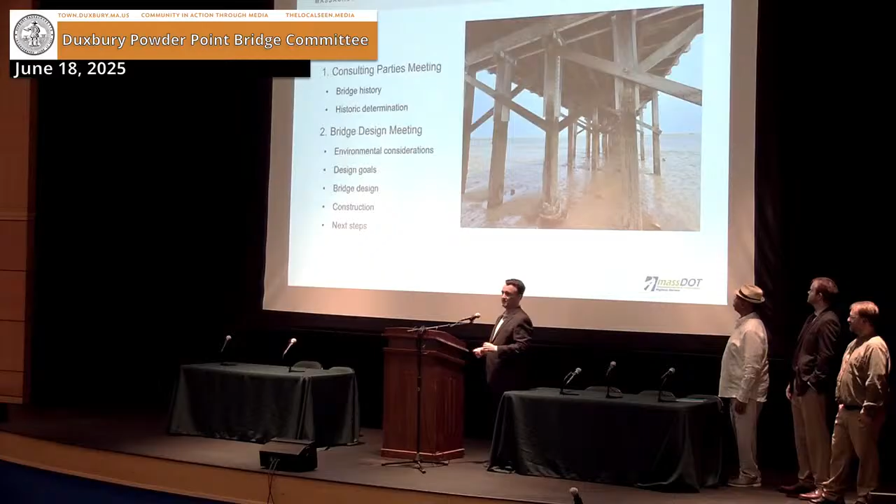One thing I want to remind you all is we are engaging in this public information process far earlier than normal, and that's good because you're involved. But I please ask you to be patient with us when we say we're not sure yet, we haven't gotten there yet. It's just important because you can't both come early and have all the answers. I know there might be a little frustration around that. It's an important thing to keep in mind.

Another thing, this isn't the only time we're coming here. We plan on coming several times because we know how important this bridge is to the community and we know how much back and forth there needs to be. So I just want to table set with that before I start plowing into this preordained presentation.

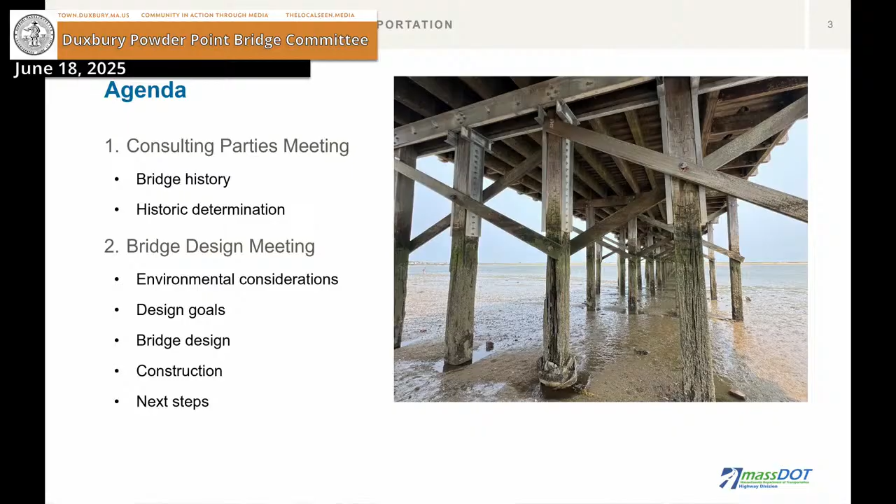Once we get to the bridge design meeting, we do environmental consideration, design goals, initial thoughts on bridge design, including some constraints due to federal requirements and state requirements, construction, and next steps.

Introductions. Myself, Marco Pereira, project manager with MassDOT Major Projects. We have Jeff Shrimpton, the program engineer for design in our environmental section. Kurt Jurgensen from Historic. George Batchelor to represent architecture, landscape architecture. And Shane Souza from our District 5 bridge section, who can speak on, should it come up, maintenance issues and the like. From the bridge design team, we have Peter Wu, who's the HDR, our consultant project manager, Tony Santoro, who's the deputy project manager, and Ben Holsapple, the HDR lead structural engineer.

With that, Jeff? Or sorry, Kurt, I apologize. Are these on? I mean, I can stand at the mic. I should introduce myself. I should, yeah. Good evening. Oh, this is not on. Oh, please. Good evening, everyone.

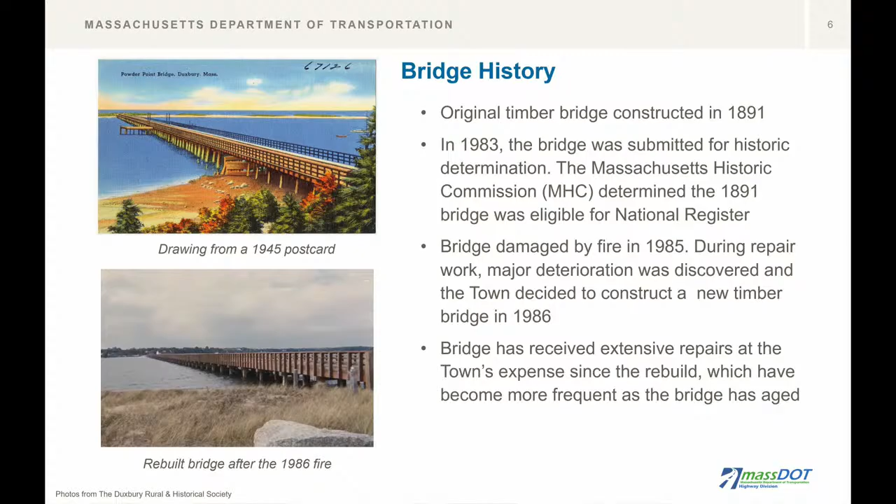So a little history on the bridge. The bridge at this site was first built in 1891. That was also a timber pile trestle structure.

In 1983-1984, the bridge was submitted to the Massachusetts Historical Commission, which is the state historic preservation office, for consideration of its historical status. At that time, the SHPO determined that the bridge was National Register eligible, despite having undergone successive rounds of repairs and replacement of original material.

A few years later, in 1985, the bridge was damaged by fire, and as repairs were being undertaken to address the damage done by the fire, it was discovered that there was significant deterioration present, and the town decided it was prudent to replace the bridge entirely at that time, and a new structure was built and opened in 1986.

Since that time, the existing 1986 bridge has also undergone extensive repairs, and those repairs have gotten more costly and come more frequently as time has gone on and the bridge has aged.

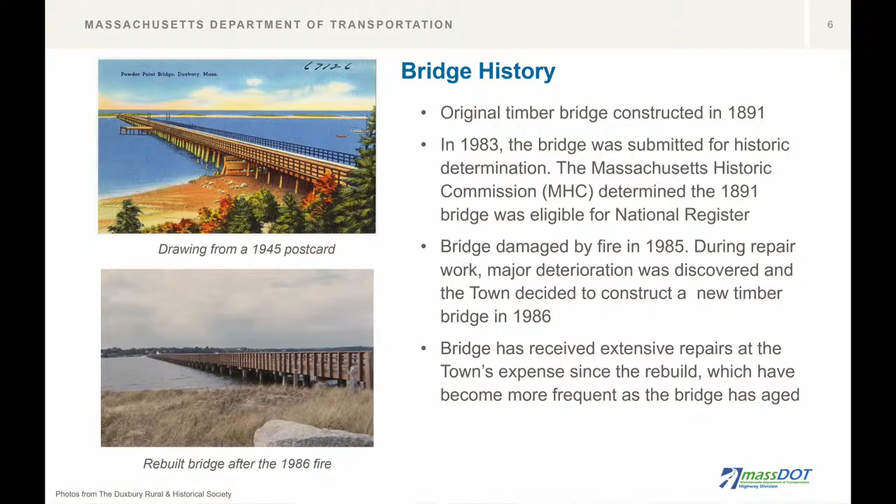Okay, the historic determination of the current bridge. MassDOT Cultural Resources, including myself, took a look at the 1986 bridge and the existing National Register eligibility determination from 1984, and we felt that it was warranted that we submit additional information for consideration to the Massachusetts Historical Commission, which we did in November of 2024.

Due to the existing bridge having been built in 1986, fully replacing the 1891 structure, the State Historic Preservation Officer determined that it was no longer National Register eligible, concurring with MassDOT's eligibility opinion.

There's a benchmark for buildings, structures, and sites to be considered eligible for listing in the National Register. Typically, 50 years is the benchmark, and anything younger, unless there are extraordinary and exceptional merits to be considered, will be considered ineligible.

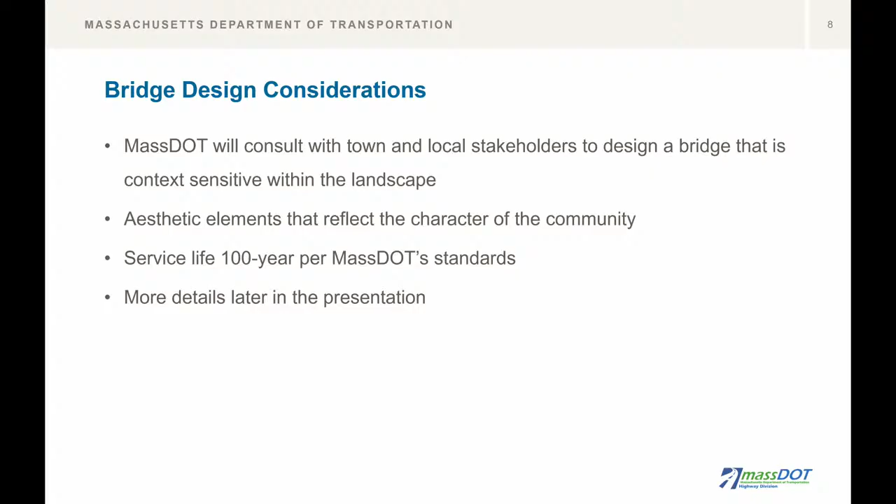More details will be discussed later in the presentation on aesthetic considerations we're thinking about and could potentially include. But as I said, we're fully open to new ideas and options that anybody may have to present.

At this point, I'll open it up briefly for questions specifically about Section 106, that process, the National Register eligibility status of the bridge, and everything I've been discussing right now.

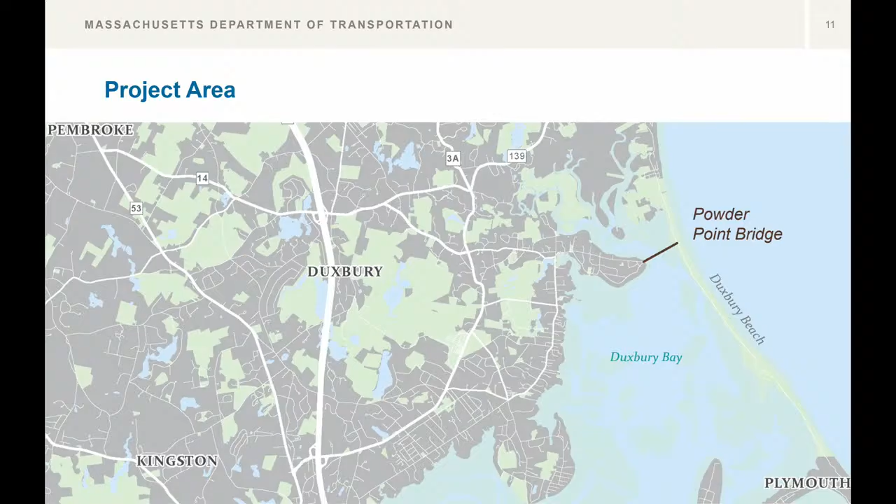Next slide, please. So I don't need to tell you where this bridge is - you all know, but for maybe hard of hearing, I'll say it's on the east side of Duxbury, and it's the only access directly from Duxbury to the beach. You can see it there in brown. Next slide.

Bridge condition, it's not great, you know this. Entirely timber structure with metal fasteners, in serious condition due to the marine environment, with some steel and fiber reinforced polymer repairs. In 2013, 40% of the piles were repaired with fiberglass jackets. By 2024, only 14% of the fiberglass jackets remained, and vehicles traveling over the bridge are limited to no more than 4 tons in weight.

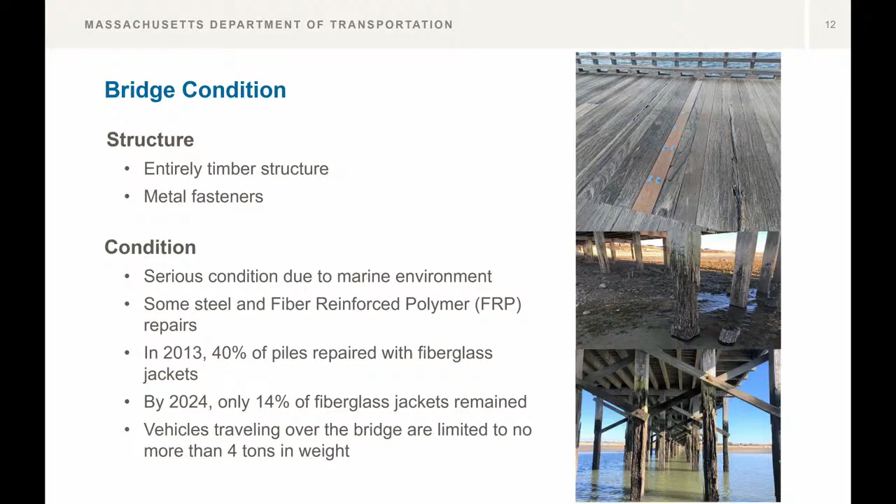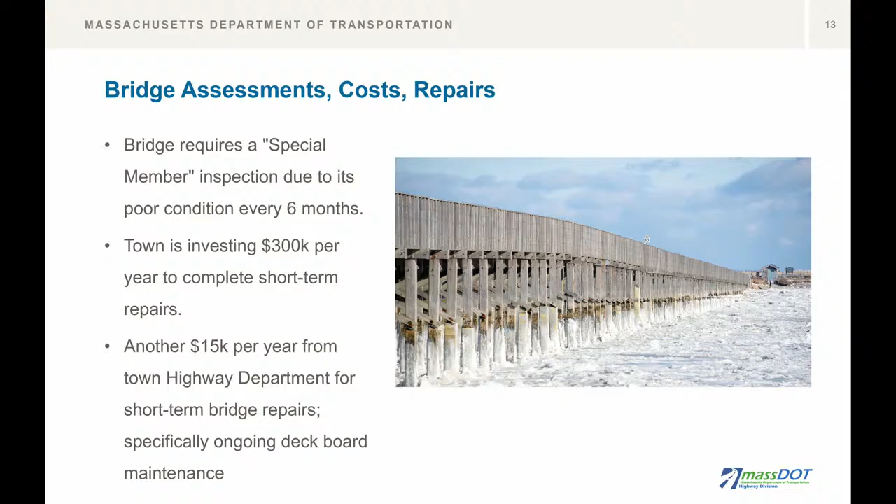The bridge requires a special member inspection due to its poor condition every 6 months. The town is investing $300K per year to complete short-term repairs, and another $15K per year from the Town Highway Department for short-term bridge repairs, specifically ongoing deckboard maintenance.

Again, we're just reiterating the same points. To construct a context-sensitive bridge, the key for us, looking through the lens of non-historic eligibility, pending challenges notwithstanding, we are obliged to build a bridge with a 100-year service life, that's MassDOT standards, just so we're not the only bad guys. The Federal Highway Administration, the funding authority, has a 100-year service life requirement, and that's important to keep in mind. Historic designation notwithstanding, we'll keep that in the back of our mind, understanding that if it goes in that direction, some of these things are moot.

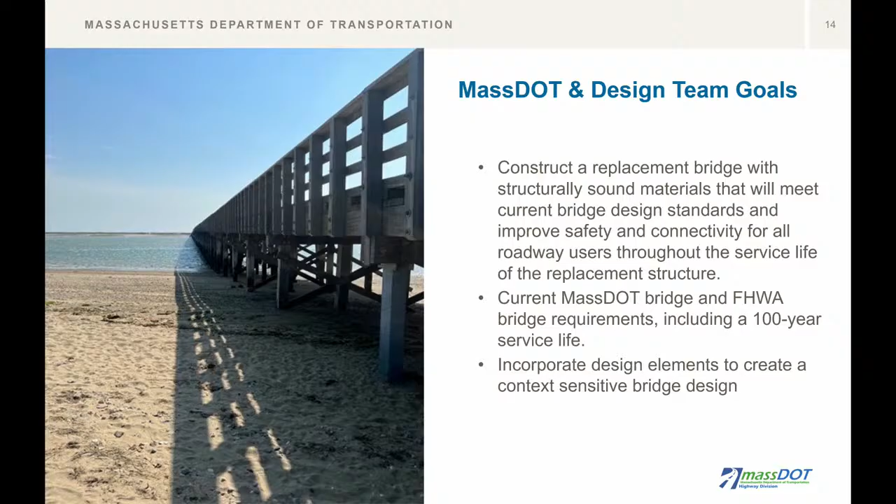So, what are we thinking? We know that the Mitchell River Bridge is the closest example. It's not the same bridge, let's start there. It doesn't have all the same elements, but it's a good example to start with.

We've heard from members of the community that there's a lot of corollary context. So again, through the lens of not historic, we asked ourselves, well, all that aside, what should we do for the community? What kind of bridge should we attempt to start the conversation on? I want to reemphasize, we are just starting the conversation. We are very early in the process.

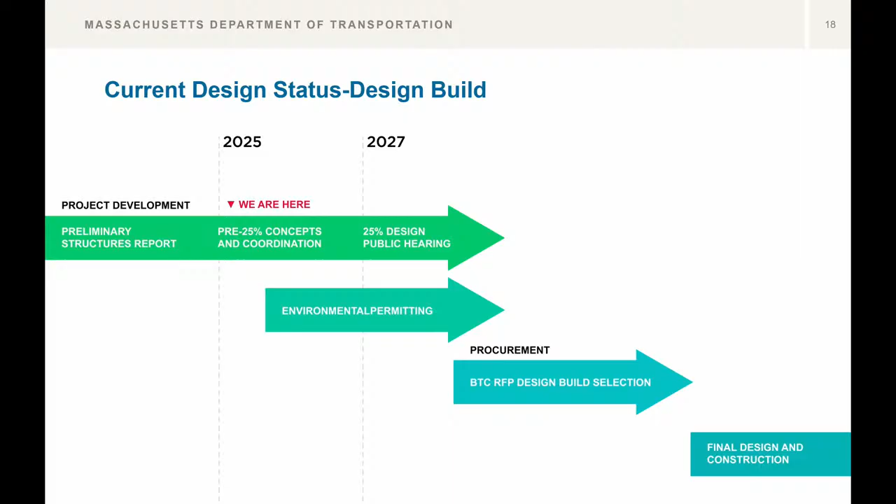With that, I'll turn it over to HDR to go over some of the environmental considerations, some of the design constraints, and then we'll circle back and we'll enter Q&A.

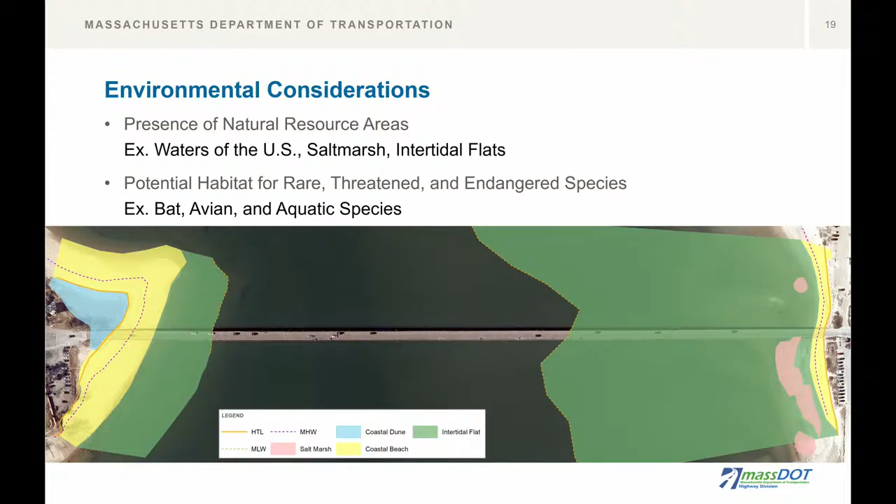Thank you, Marco. I'm Ben Holzak with HDR, lead bridge engineer. What you're looking at here is some of the initial environmental mapping that we've done. We've already gone out to the site, done some environmental surveys. So there are some protected areas around the bridge site. Notably on the east side there's some salt marsh. And the area is also within the potential habitat range of several protected animal species.

This is a screen grab from our hydraulic model. So this bridge is subject to both riverine and coastal behavior. That means tides and storm surges in particular. There is significant sea level rise that's projected in the area, so we're taking all that into account in our modeling. We're also doing some data collection to actually physically measure what the tide is and what the sediments are out there to help us calibrate our models to what's actually going on in the real world.

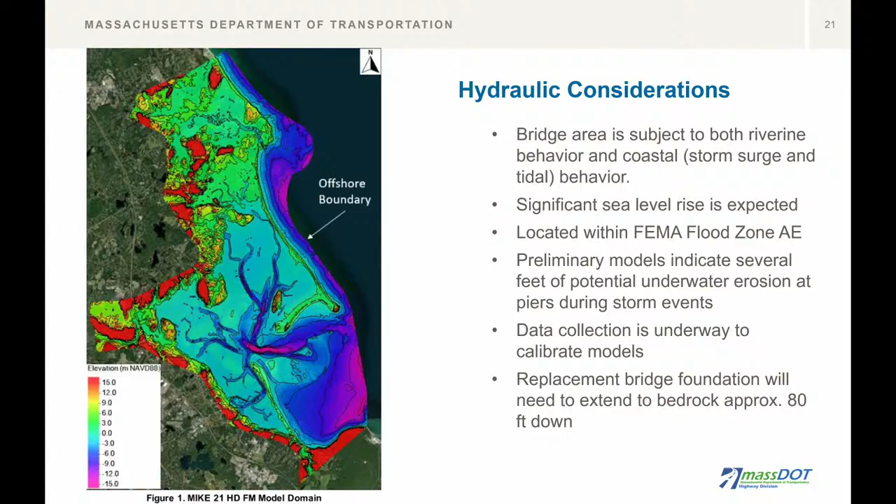So the preliminary, again very preliminary, models are indicating several feet of potential underwater erosion, what we call scour, at the bridge piers as you go across. That combined with the geotechnical information that we have is pushing us towards deep piles. They're going to have to go down to the bedrock, which is about 80 feet down, so they're going to be quite long piles that we're talking about here.

So we've alluded to this a couple times. Service life: MassDOT's requirement is the 100-year service life. Federal Highway has similar requirements. Service life does not mean that it lasts for 100 years and you never have to do any maintenance on it, that's not what that means. It means you have to do regular maintenance, but the primary structural components are expected to last 75, 100 or more years on new and replacement bridge structures.

So the existing structure, as you can tell, we're here today. We've been talking about 1986, that's not 100 years ago. The existing timber structure has not even close to met that criteria. And not only are we here today talking about it, but those substructures, the piles that are out there today, those have actually been rated in poor condition since 2012. So the bridge degraded quite quickly from when it was originally built.

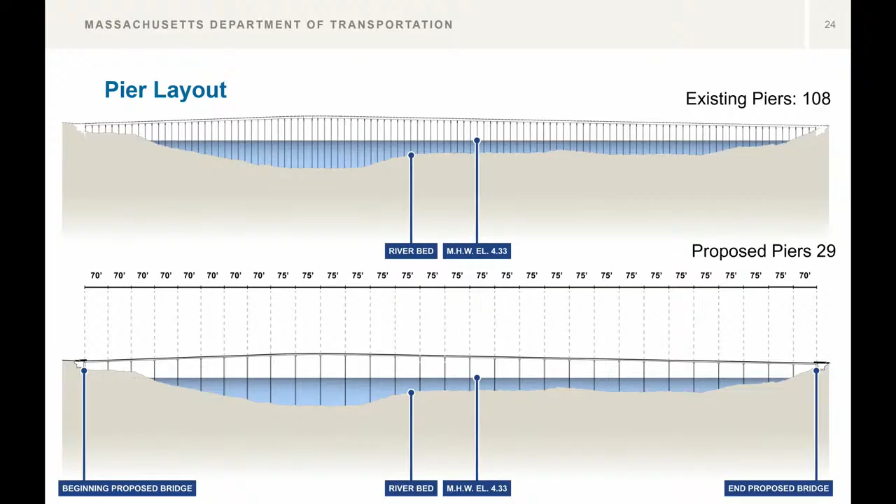With modern materials, we can have much longer spans. We're looking at 70, 75 feet versus 20 or 25 that's out there now. There's a lot of reasons to go with fewer spans and fewer piers in the water. The next slide has a few of them.

The pile installation is work that has to occur in the water. Typically, it's one of the most expensive and difficult to schedule parts of constructing a bridge. Going back to all the environmental considerations we have, when you're driving piles, you tend to generate a lot of turbidity, or silts and stuff in the water column. So there are very often significant time of year restrictions, meaning you're not allowed to do that during certain times of year when fish are breeding or things like that.

So the fewer piers you have in the water, the faster you can get it done, the cheaper you can get it done, and the less environmental impact you have. And not only the time of year, but each individual physical footprint that you put into the water is also considered an environmental impact. So there's a variety of reasons that push us towards fewer piers in the water.

We did do a study as well, just to look at what it would take to match the existing number of piles, all those restrictions notwithstanding. The preliminary analysis is that, because these piles have to go down 80 feet, and because it's difficult work in the water, that would add up to about $50 million to the project cost. So that's it. Next one.

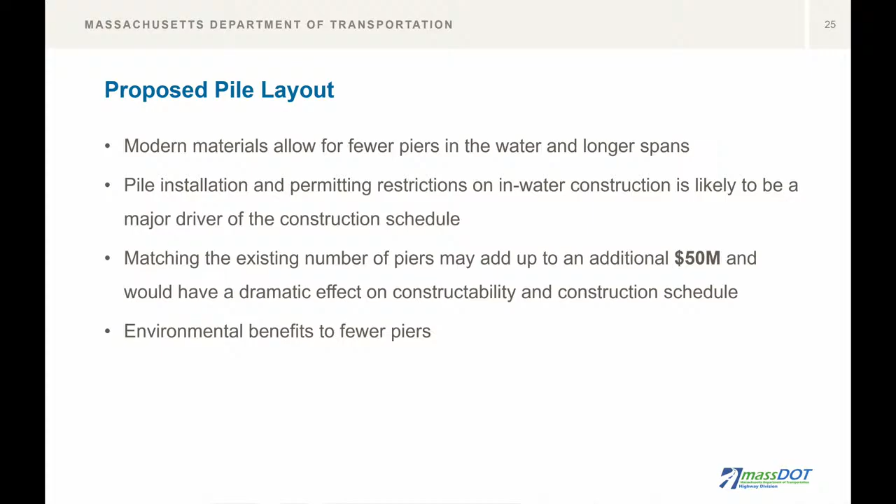Design elements and aesthetics, go ahead. We'll talk a little bit about cross-section. What's up there now is the existing bridge cross-section, timber bridge, 10-foot lanes, 5-foot-5 sidewalk. Go right to the next one.

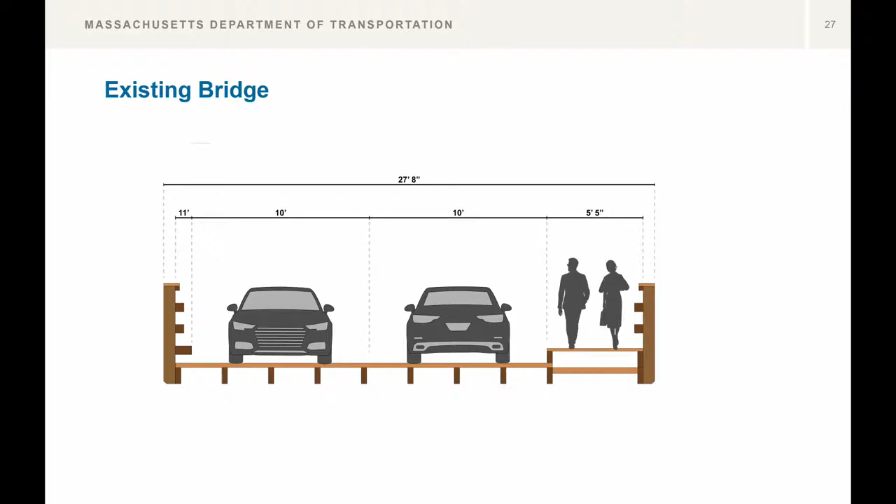This is kind of your baseline, one potential option for the bridge. There's a couple things I want to talk about and then move to what we can do. So we want to keep the relatively narrow lanes. 10-foot lanes is not what you're going to find on a highway or anything like that. You keep them relatively narrow to help encourage people to drive slow across the bridge. You don't want to widen it up too much so people feel like they can go quickly.

A slightly wider shared use path so that folks who are walking over the bridge or biking over the bridge have the room to do so. And then to bring your attention to the railings, we've alluded a few times to federal requirements. There is a federal requirement for bridge railings and traffic barriers.

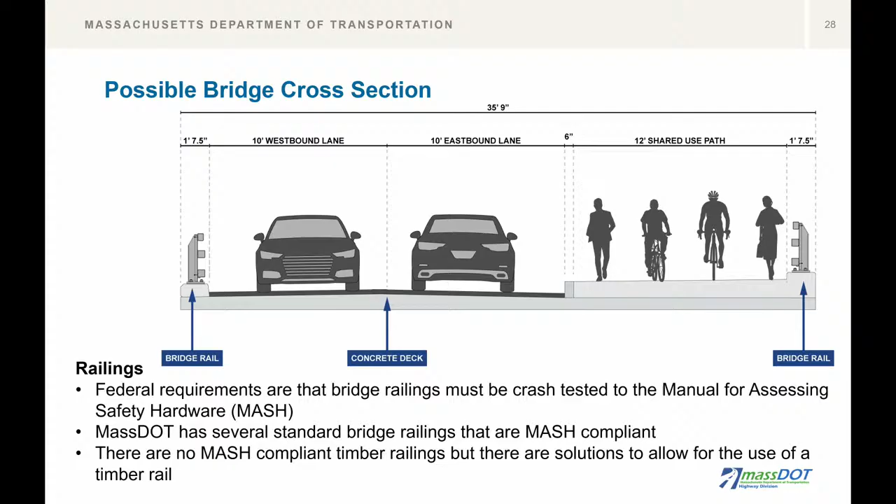It's called MASH, the Manual for Assessing Safety Hardware. And all projects that get federal funds have to meet MASH. So that's a specific criteria for the design, and more specifically, the crash testing of traffic barriers. MassDOT has a number of standard bridge railings that are MASH compliant, or crash-worthy as you'll sometimes hear. None of them are timber. However, we do have some strategies that we can use to get a timber railing on this bridge.

Bring it back around to some of what Marco was alluding to earlier. We've heard, even before tonight, Chatham as a good example for what the community might be interested in. So the timber rail I was just talking about, the photo on the left shows what that rail looks like from the outside. That's the Mitchell River Bridge in the photograph.

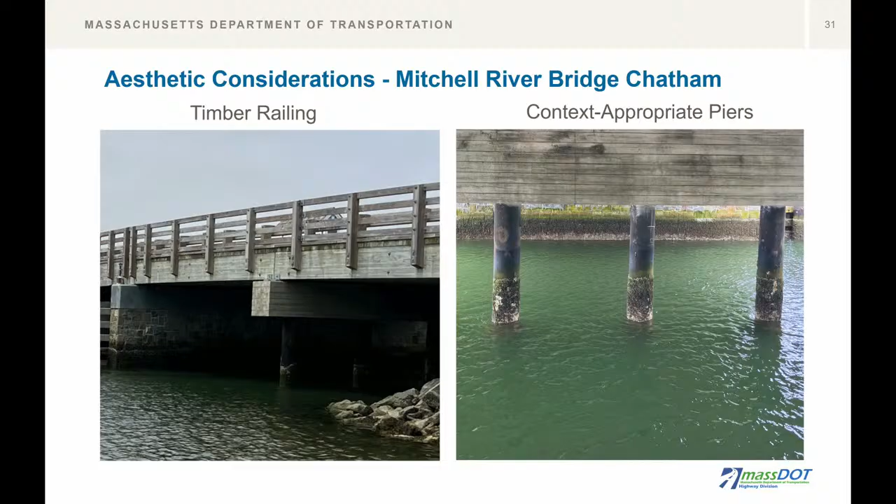That type of rail, protected from crash impact by that curb-mounted standard rail, is what we're looking at for the railing. Below, you can see an elevation, and in section on the right is the type of piers we spoke about. The vertical elements are the piles - that's what's going to go down 80 feet to bedrock. Then what we call the pile cap or pier cap would be concrete, but form-lined so it has a bit of the aesthetic appearance of timber.

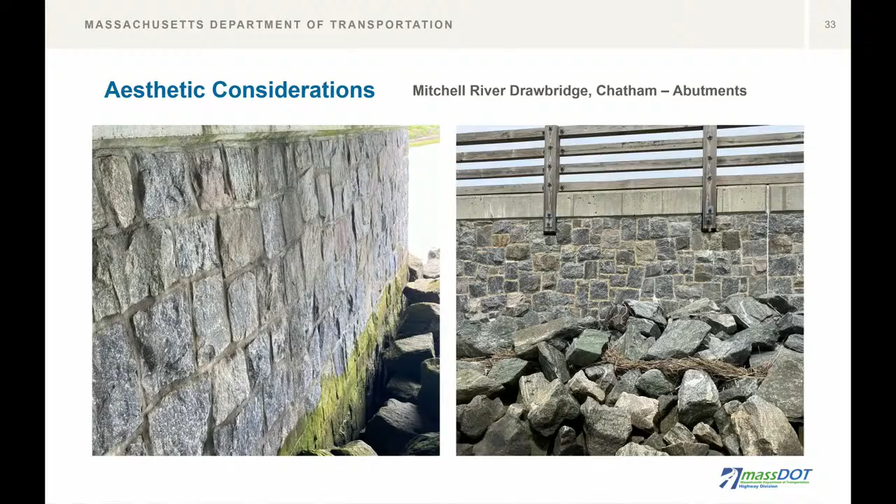A closer up view of the piers, again this is Chatham. The abutments - going back to meeting both context sensitivity and the actual design requirements of the structure. What's behind here isn't a stone masonry abutment, it's actually a concrete abutment, but in front they've faced it with actual stone. It's not a form liner, they're actual stones anchored back into the structural concrete abutment. So the concrete abutment gives us the strength we need, and the stone facing gives more of the aesthetics and context sensitivity.

Driving surface - Marco alluded to this a little bit, there was some discussion on it. The typical or standard or baseline would be black asphalt. We've already heard some feedback, so we're looking into an exposed concrete driving surface. What we typically do for exposed concrete decks is groove them transversely - there's some science to it, but basically grooving it transversely also tends to increase road noise. We're even looking at whether we could groove it at a similar cadence to the existing deck board spacing, to show as much respect to what's there now as we can within design guidelines.

We talked a lot about timber decks, so we looked into the maintenance it would take. Marco alluded to the fact that the deck not only is the driving surface, it also protects the structure below. If you have a nice solid concrete deck, that's not just what you drive on, it's also what's protecting what's below - eliminating as many joints and openings in the bridge as possible. When you go inspect bridges, that's where the deterioration is, where water comes down from the riding surface onto the structural elements below. Big picture, the maintenance cost for a timber deck is going to be on the order of double what a traditional concrete deck would be. The timber deck would also not protect the structural elements below from the water, the salt, the deterioration. So part of the concern is that not only would the deck itself deteriorate, the structural elements below would be subject to greater exposure and greater deterioration.

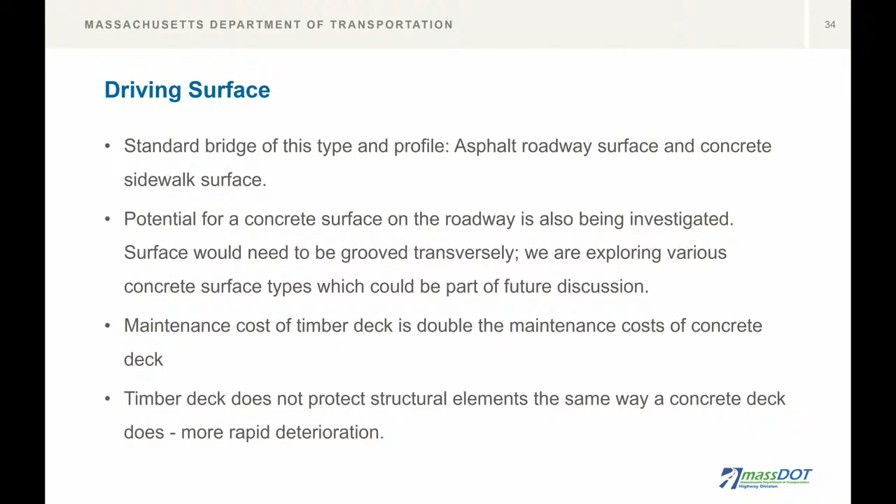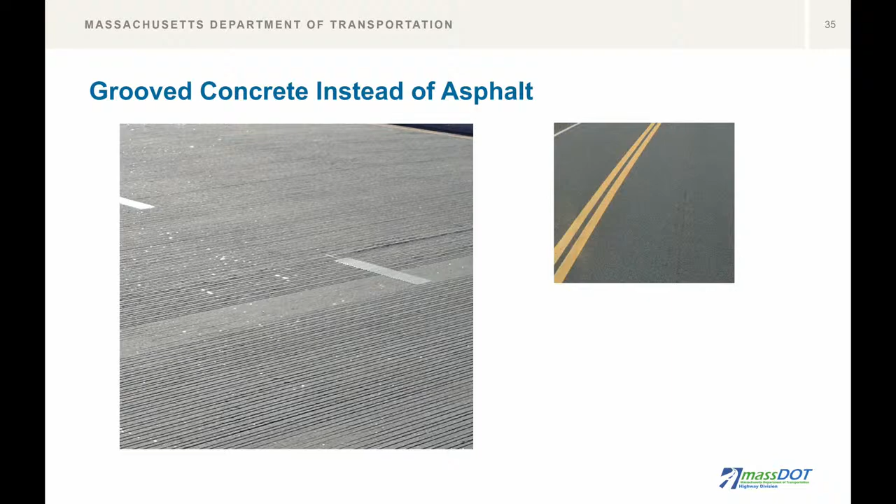Some items about constructability - go right ahead.

In terms of where the replacement bridge will be placed, what we're proposing is to replace the bridge in more or less the existing location of the bridge that's there now. I won't say footprint, because as you saw in the cross sections, the new one likely will be a little bit wider, but it would be in the same place - not off to the side or on a different alignment. There are a lot of reasons for that: you minimize impacts to the right-of-way, you minimize environmental impacts. The environmental map I put up earlier had that big salt marsh on the eastern end, so if you stay in the same location you avoid impacts to that environmental area. It avoids work to tie the bridge into the approach roadways, and it avoids change for everyone in this room and everyone who couldn't make it tonight. So the new bridge will be more or less right where it is today - you don't have to change the way you interact with it.

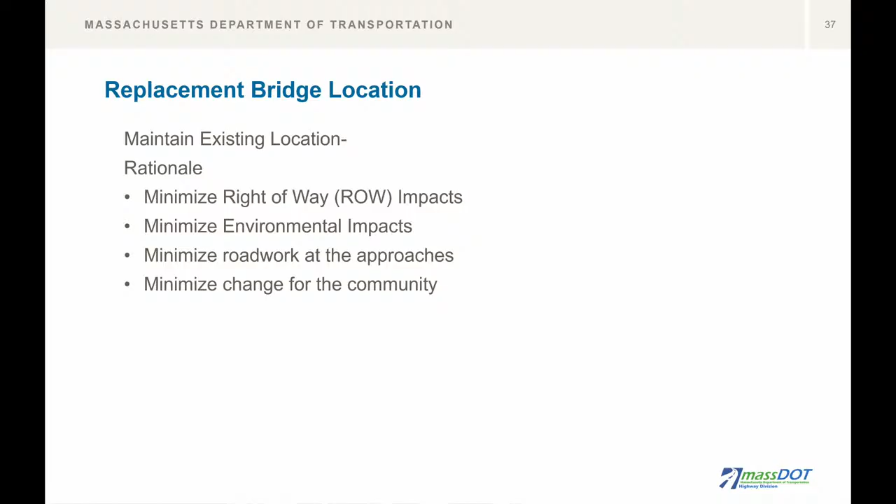For the actual construction of the bridge, unfortunately, it will need to be closed while the work is going on. So when they go out and start demolishing the bridge that's there now, it's going to have to close down and won't open again until the new bridge is substantially complete. That will mean that for the duration of construction, there will need to be a detour around up to the north through Marshfield. That's about 7 miles to access Duxbury beach.

We're very early in this process. One of the things we're working through actively is the actual means and approach to how it would be built. We're still looking into how much of this could be delivered or built from the water versus from the land. There's a lot of variables in that process, so we don't really know yet how that will look. And harkening back to the environmental side, we don't know yet what the time of year restrictions will be. Between these two things, particularly the time of year, that can be very restrictive. We don't know yet how long that process will take because we're so early.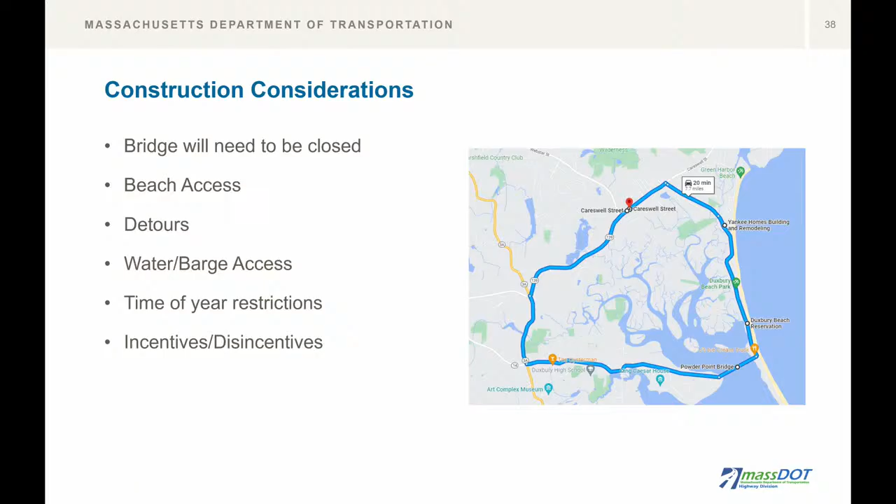One of the things that the design-build contracting mechanism can help us with is one of the tools we have, called incentives/disincentives. That's a financial incentive built into the contract to encourage the contractors to finish the job on time or early. If they do so, there's typically an incentive payment structured in an appropriate size to incentivize accelerating the construction. Next, a bit about the design schedule—hand it back to Marco.

Thank you, Ben. Schedule—even this is not set in stone. We will meet with you more than this if necessary.

The first thing we're proposing in the fall is a design charrette. The format of that's different—we don't come up here and just talk at you. We'll be at tables, we'll have ideas, and you'll see shortly that we've come up with a way for you to contact us throughout. We are going to want to hear from you, and I know we will.

This is the high-level initial schedule. Spring of 2027 is when we expect the base technical concept to go out. After that, we have a design public hearing. The design public hearing is probably what much of you are expecting—that's when the DOT comes out and says, this is what we're going to do, and everyone has at it. We're very far from that, as you can see. So that high level is what the schedule is. As we go, these things will evolve.

Next slide. This project deserves its own website. It needs it. All this material is going to be posted up there, and perhaps more importantly, that email address. This is not a black hole.

I realized by the amount of contact I was getting that we needed to bring on some extra help. We have Howard Stein Hudson monitoring this email. They're going to monitor it regularly and work with us to come up with answers as quickly as possible. We want to hear from you.

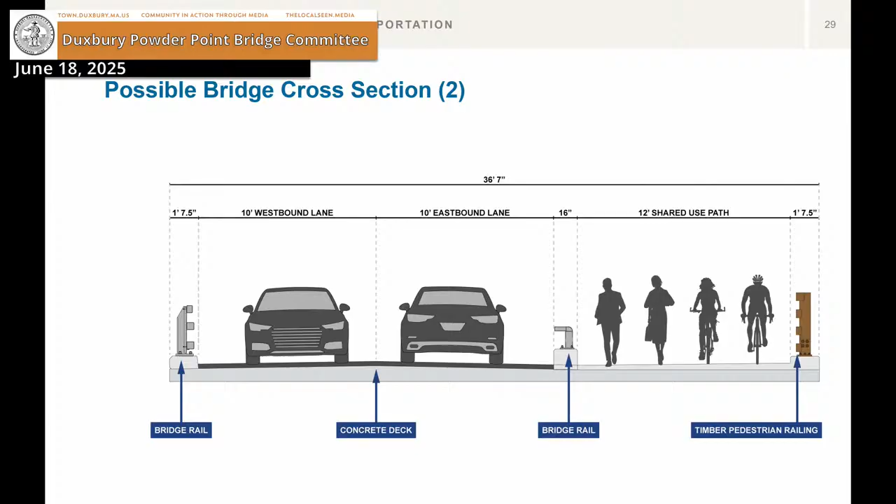Ultimately, that ends up with an 8-foot lane, or 8 feet of space, on either side. So you'd end up with 16 feet on the roadway. We have 20 feet now, so that would bump out to 36. Then we would narrow that path down to 5 feet. It ends up being a delta of, let's say, 7 feet

extra from what we're seeing here displayed. So we've already taken a first pass at it, and of course this is not definitive. We're still going to look at it, see what we can do, but ultimately we're bound by the design criteria. Hopefully I answered the question.

Thank you. I just wanted to add that the design charrette we're having is where we can really get into it on paper together. That's really a good forum where we'll be able to talk a little more thoughtfully about these things and explain it more thoroughly, because we won't be that far along then either.

Hi, Mary from Temple Street. I came tonight with concerns about character and about durability, and clearly you're covering those pretty nicely. My concern right now is, do you have a method? We have about 16,000 registered voters in Duxbury, and obviously there's a keen interest here tonight. Do you have a method of communicating so that there's a much broader sense that we all know what's going on? And the second question is, do you have an elastic financial situation that you can accommodate, or are you bound by certain figures that have to be met?

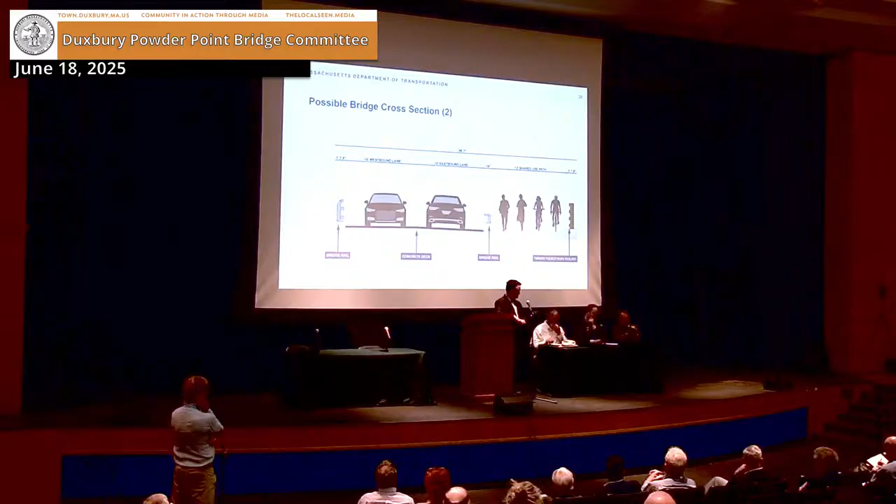Thank you. And if I could say something—thank you very much for mentioning the work that was done to maintain the bridge. I appreciate that as a historian.

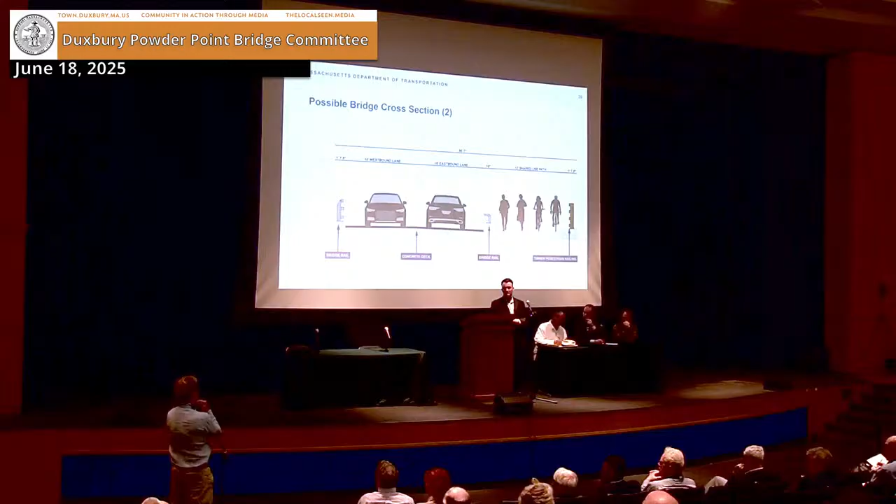Emmett Sheen, Powder Point. Many of us have moorings and boats on this side of the bridge. We happen to keep two in all year round unless ice prevents that. I truly hope there will be accessible ways the whole time. There is one oyster grower back there, but throughout, when the new bridge comes in, they keep the channel where it is, which I assume you would, but accessibility is going to be a key part.

Sure, yeah, I'll speak on it. I'll preface by saying we're very early, so I don't know that we've exactly sorted out what the restrictions would be. Typically there would be a requirement that you keep the navigation channel open virtually at all times. Maybe you're placing the beams directly over the channel, and you don't let a boat through at that time, but that's just how it typically goes.

Jim Sullivan, Wadsworth Road. Where in your design process do you cover off on perhaps what could better be described as functional, as opposed to structural or aesthetic? I'll give you an example that starts to cut across a few of them, and it comes up in the context of the bridge surface as well as the discussion on traffic calming.

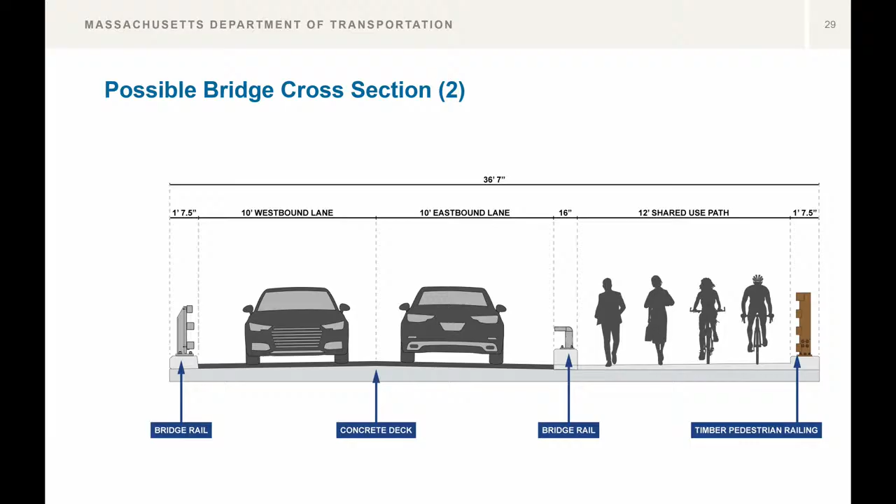Hi, Bill Godoy from Powder Point. I've been looking at this cross-section, and while I'm a very proud father of a 13-year-old Yahoo with an electric bike, I look at this and I don't think bikes should be sharing the sidewalk. I think they should be sharing the roadway. Electric bikes that I'm seeing more and more around town are making this bridge more accessible to a lot more people at a younger age. So I'm curious to know your opinion of having the bikes stay with the cars, going at a slow rate rather than 25 or 30 miles an hour, and leave the walkway.

I'm fearful of someone picking me off if I'm walking on something where an electric bike could be flying by at 20 miles an hour. So I'm personally with you on that line of thinking, but I'll bounce it to you to speak on it more thoroughly. Thank you. Sure, great question.

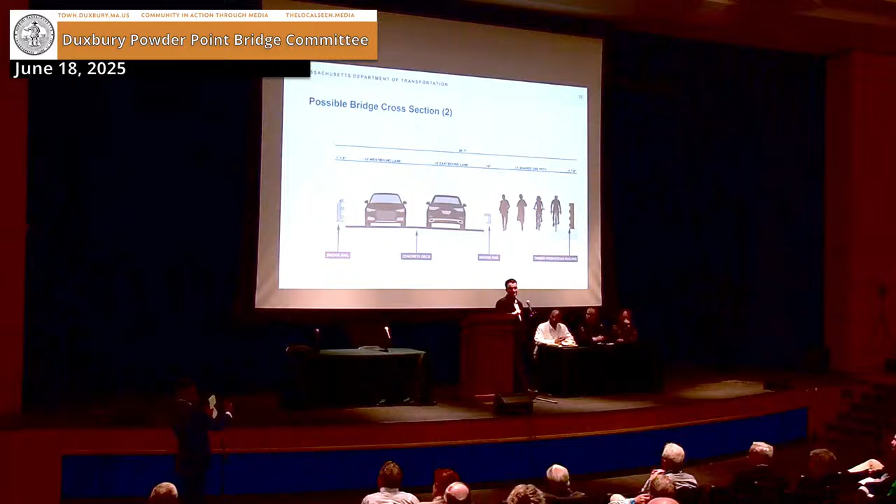Yes, there are means for separating bicycle and pedestrian traffic. Typically, at least in this configuration, that would not necessarily be a 12-foot shared use path, but it could be a combination of, let's say, a 6-foot walking surface, then separated with a 2 to 3 foot buffer, and then a separate bike facility or bike lane potentially at a different grade. Now, because we're required to provide bi-directional facilities, that would make that bicycle facility a little bit wider than this combination of a 12-foot shared use path. But I do want to acknowledge that it is possible we can look at something like that.

Thank you. Anybody else?

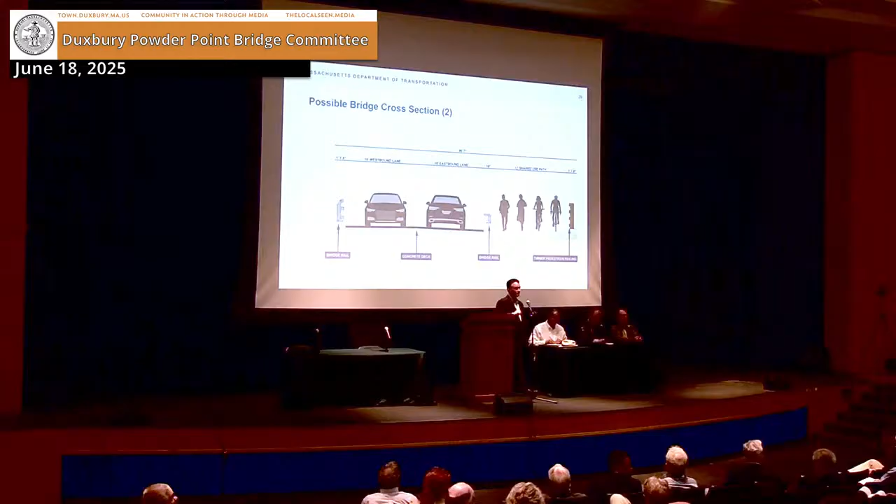Good evening. Mike Count, Arrowhead Road. Thanks again, you guys, for your presentation, getting the public involved. It's much appreciated. I just had a couple engineering questions.

On the pilings, you mentioned all would need to be driven to bedrock at 80 feet. What type of borings have been done to date within that area? And specifically on the pilings, what are being proposed for the type and size? Take it away.

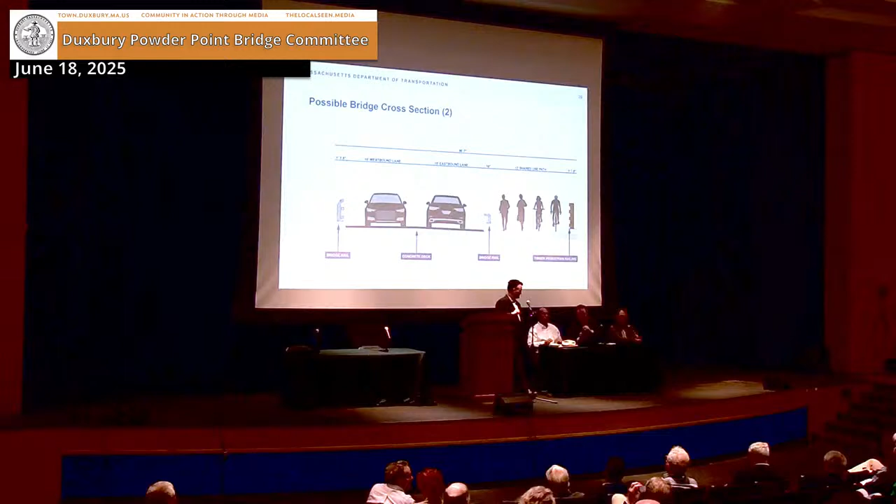So first, the borings. We've done what we're calling a pilot boring program out there. I couldn't tell you the exact number, but we've taken a few borings in the water as well as at the abutments. It's nowhere near the number required for final design of the structure, but we've done enough that we're fairly confident of what we have out there, and we have a few more that are going to be done in the coming months.

Your second question was what type of pile it would be. I can't answer the size part yet, just because of how early we are. I don't know what the diameter of the pile will be. But the pile type is anticipated to be concrete-filled steel pipe piles. So it's a steel pipe that would be driven down 80 feet to bedrock, and it would be filled with concrete on the inside, typically then coated on the outside with an epoxy-type material.

Follow-up question: for the design life on those pilings with the coating, is that anticipated to be 100 years or?

There are some provisions. This is one of the things we're still working on, but there are some guidelines for how much we call sacrificial thickness to assume on the thickness of that pile. So based on how long the pile is expected to be in service and the exposure condition of the salt water, there's particular guidance for how much thickness you should assume will get lost over the design life of the pile. It's something we are taking into account in the design process.

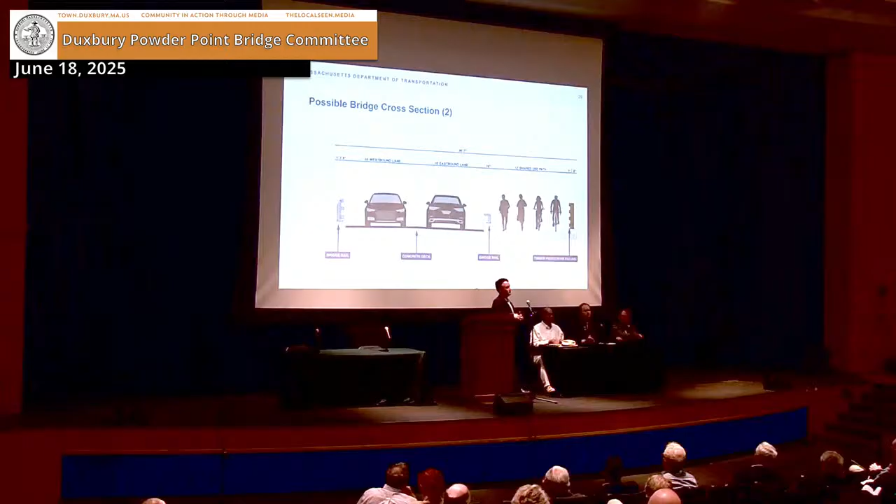So, anywhere from adding more width to affecting the span configuration, that starts to get a little tougher. I'm not saying nothing's off the table, but it is one of the things that, because it's the most practical and cost-effective approach, we have to start from there.

Yeah, I guess my only suggestion is just knowing the area and the characteristics of bedrock along the waterfront, I would... I would just think that doing additional borings at this stage, knowing the implications of pile lengths and sizing, is a huge factor when looking at the cost for one design versus another. It may be a good idea to get more advanced exploratory borings done earlier in this case than later.

So, if I may, we are. I looked at the plan yesterday for us to go out and take more borings. We're looking at a good deal more, in fact. I couldn't tell you the number off the top of my head, but it's more than we have right now, to get a better longitudinal section of how the bedrock and all of the subsurface conditions vary along the length of the bridge. Great, thank you very much. Thank you.